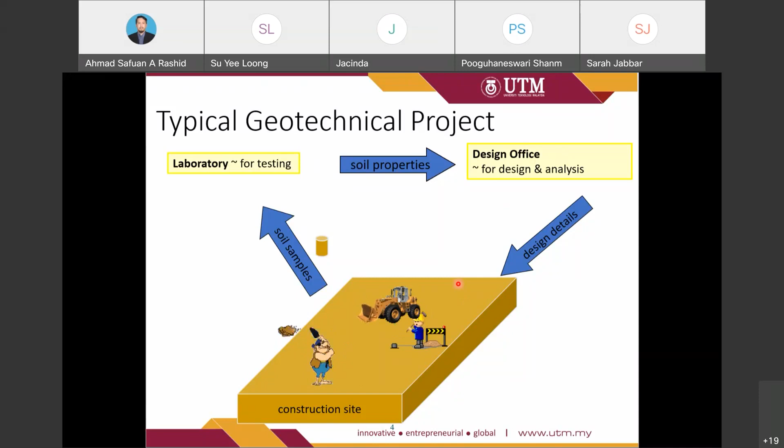The main important thing in the design is to make sure that the structure is able to provide good comfort and serviceability, and also prevent any failure, which is collapse. So in the design, we discuss the serviceability limit state (SLS), and then we also have the ultimate limit state (ULS). Normally when we design, we may use the design load.

So the design load should be monitored to make sure that it does not reach the allowable settlement, in order to have a very good design that prevents any settlement and also prevents any tilt.

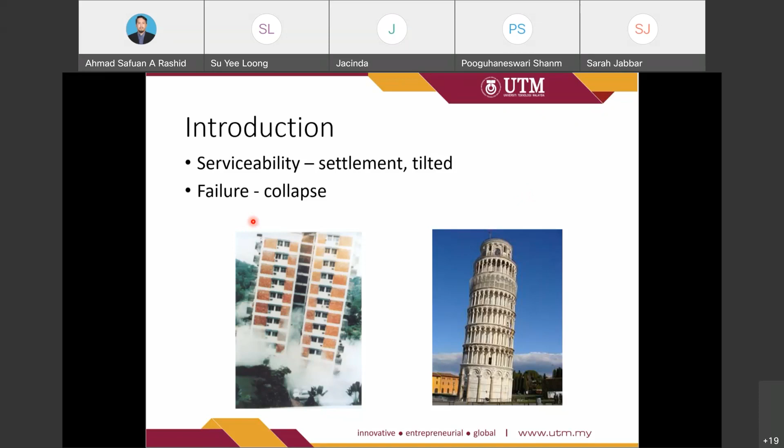Traditional soil mechanics and geotechnical engineering design was predominantly concerned with soil strength and stiffness, so that the design engineer could define the failure state of the soil and control excessive deformations of the soil structure. So that is common work for a designer, to identify the failure state and also to prevent any excessive deformations of the structure.

However, that is under what we call static loads. In this circumstance, the loading is considered static and the strain imposed within the soil may vary from about 10 power -3 in service to a few percent at failure. So there are common strains allowed to prevent failure and also to make sure it can provide good serviceability.

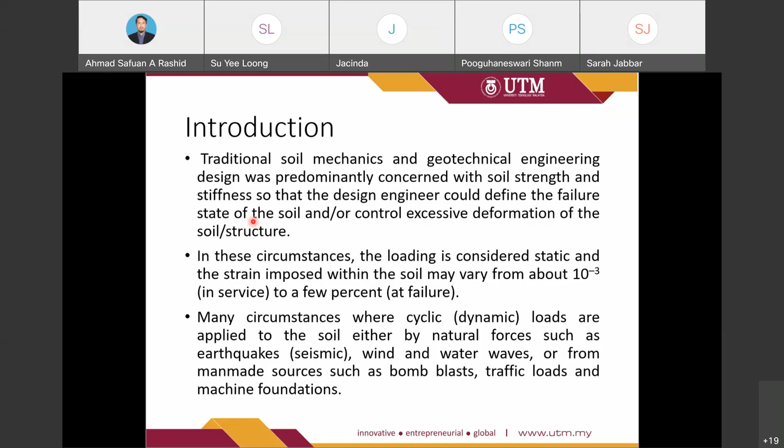Many circumstances exist where cyclic or dynamic loads are applied to the soil, either by natural forces such as earthquakes, wind and water waves, or from man-made sources such as bomb blasts, traffic loads, and machine foundations. So there will be a source of cyclic loads or vibration, either from natural forces or from man-made sources.

So the type of dynamic loading in soil or the foundations of the structure depends on the nature of the source producing it. Dynamic loads vary in their magnitudes, directions, or position with time. Periodic loads are a special type of load that varies in magnitude with time and repeats itself at regular intervals.

So this is some examples where the author tried to describe what is the source of this dynamic load, for example based on the time, such as operation of reciprocating or rotary machines.

So non-periodic loads are those loads that do not show any periodicity, for example wind loading on a building. This is caused by natural wind force.

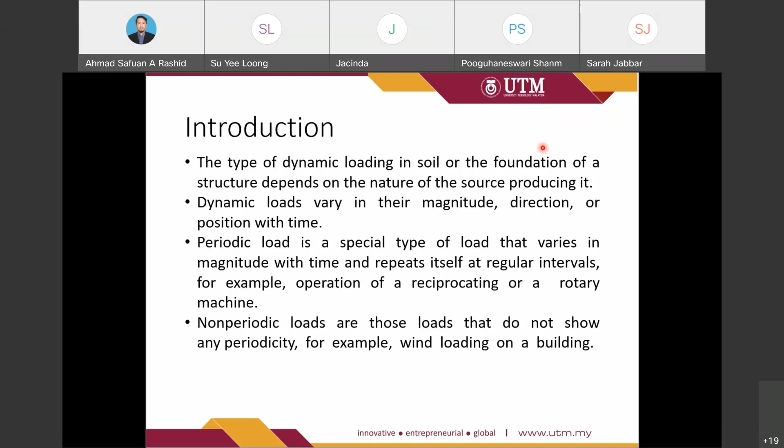So deterministic loads are those loads that can be specified as a definite function of time, irrespective of whether the time variation is regular or irregular, for example the harmonic loads imposed by unbalanced rotating machinery. So this basically is an accurate force that we can determine.

So non-deterministic loads are those loads that cannot be described as a definite function of time because of their inherent uncertainty in magnitude and form of variation with time, for example earthquake loads. This is unpredicted, so it's very hard or very difficult to determine the exact time when the earthquake load will reach.

So cyclic loads are those loads which exhibit a degree of regularity both in magnitude and frequency, while static loads are those that build up gradually over time with negligible dynamic effects. So commonly in our design, we are more emphasized on the static load, however we also can include the effect of cyclic loads in the design.

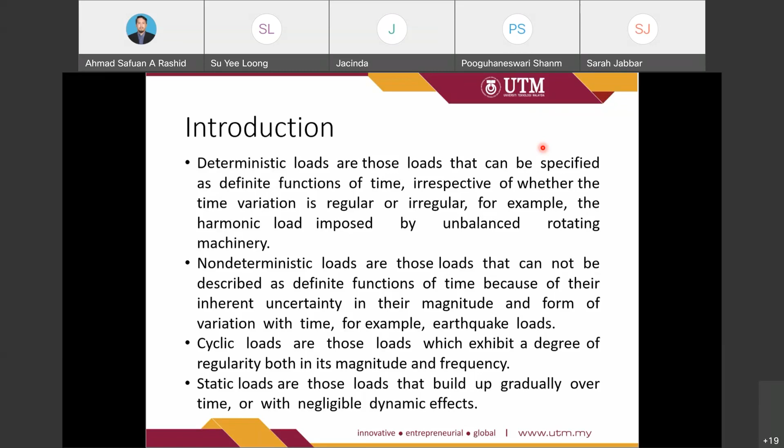So this is an example of dynamic load. So low speed rotary machines, it is a periodic load, so we know when the loads will be applied, and then it constantly shows a cycle on the load itself, on the result.

Then we have what we call a single impact of a hammer, a vertical acceleration due to pile driving. And then the last one is the accelerogram of an earthquake.

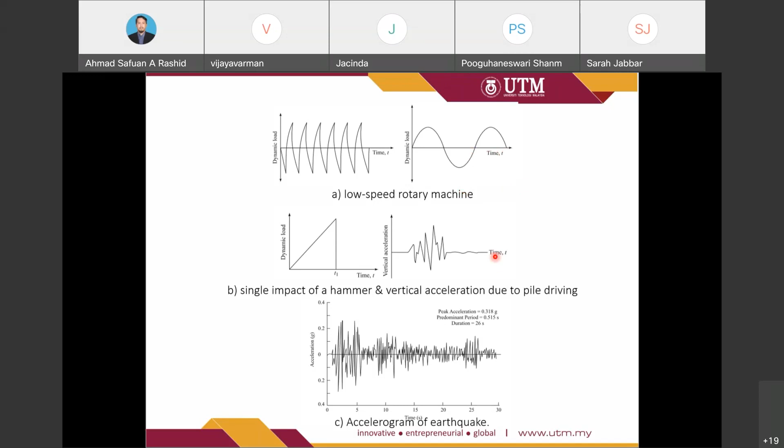So the magnitude of these dynamic loads are generally much smaller than most static loads and generate strain within the soil as low as 10 power -6.

So as we can see in the diagrams, we have two main diagrams, and this is a group of diagrams to explain the shear strain. So for this diagram, it discusses on the

time of loading. The time is very short, and also the number of cycles. So we have here three types of groups to discuss the number of cycles, where we have a shock impulse, which normally refers to blasting or bombing activity.

So the cycle is, for example, the minimum of the dynamic cyclic loads is around 1 Hz, 1 cycle per second, while it can be more than that.

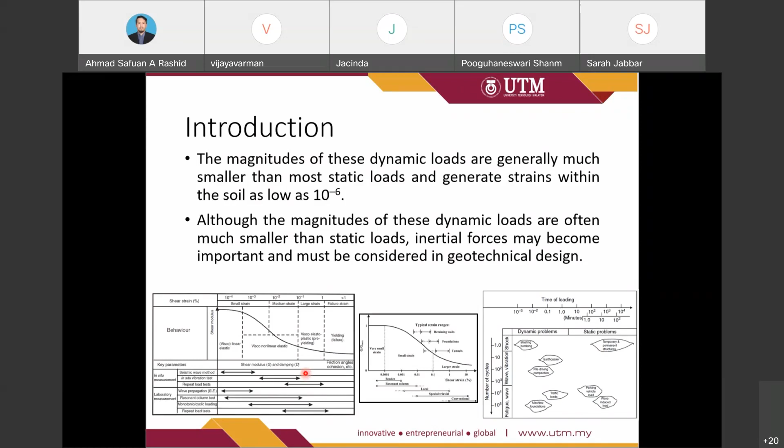So this is an example of the inertia moving to resist a change in speed or direction.

A simple analogy: when we drive a car or somebody drives a car and we sit as a passenger, if the driver stops suddenly, we feel that we are moving forward. Or when the driver accelerates suddenly, we feel that we are going backward.

The same goes for the structure. In actuality the structure is static, but if there are some accelerations on the soil, there will be an effect of the inertial force. This relies on Newton's first law: an object does not accelerate spontaneously. This property of matter which causes an object to resist acceleration has been named inertia.

Newton's first law is often called the law of inertia.

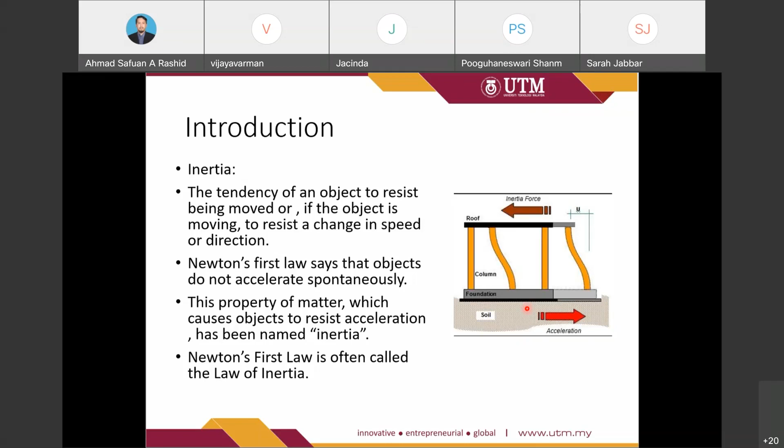Most civil engineering structures involve some type of structural element with direct contact with the ground. As I mentioned previously in the diagram, most structures rest on soil. When external forces such as earthquakes act on this system, either the structure displacement or the ground displacement are dependent on each other.

Even though the foundation structure and the supporting soil are two different physical entities, they form a system, and in terms of the mechanics of behavior of such a system, one component influences the behavior of the other, the end product being the result of this mutual action or interaction between the two.

So this is an early discussion on the study of soil structure interaction. They call it SSI.

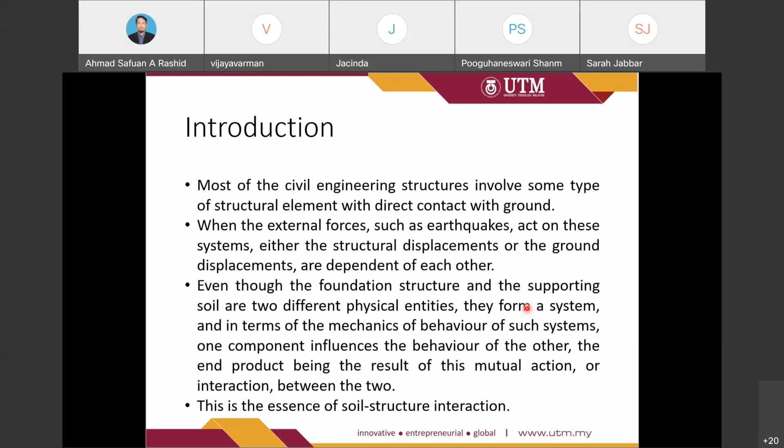At the early stage of design, before the 1980s, they did not consider the SSI effect in their designs. I guess right after the Kobe earthquake event in Japan, they started to include SSI in their design.

The process in which the response of the soil influences the motion of the structure, and the motion of the structure influences the response of the soil, is termed soil structure interaction.

Conventional structure design methods neglect the SSI effect, and neglecting SSI is reasonable for light structures. So we can use conventional design, especially when designing for a light structure resting on relatively stiff soil, such as a low-rise building and a simple rigid retaining wall.

However, the effect of SSI becomes prominent for heavy structures resting on relatively soft or loose soil, especially granular soil. For example, nuclear power plants, high-rise buildings, and elevated highways on soft soil.

So from there, we can get an idea to overcome these problems. One way is to improve the soft soil conditions. Or for the structure itself, maybe we can put in damper systems, which allow the vibrations transmitted to the building to be reduced or minimized by the damper system.

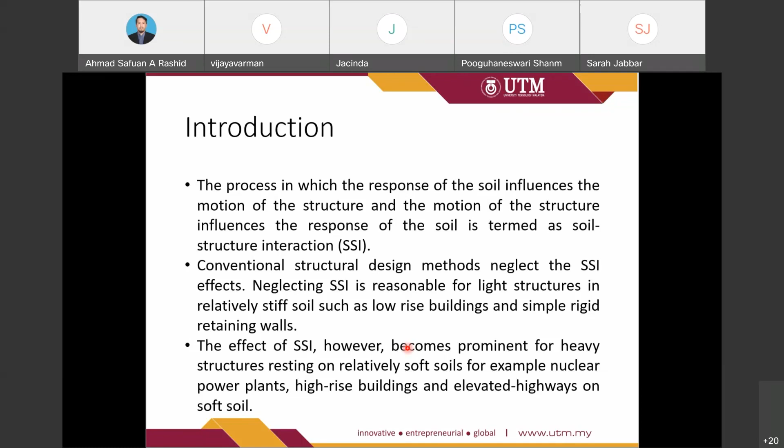Damage sustained in recent earthquakes, such as the 1995 Kobe earthquake, has also highlighted that the seismic behavior of a structure is highly influenced not only by the response of the superstructure, but also by the response of the foundations and the ground as well.

That's why I mentioned the Kobe earthquake—it's very recent, the idea of SSI. When I refer to this Das reference book, they started to embark on SSI in 2005.

In the modern seismic design code, such as the standard specification for concrete structures, seismic performance verification—this is Japanese, JSCE 2005—it stipulates that the response analysis should be conducted by taking into consideration the whole structure system, including superstructure, foundations, and ground as well.

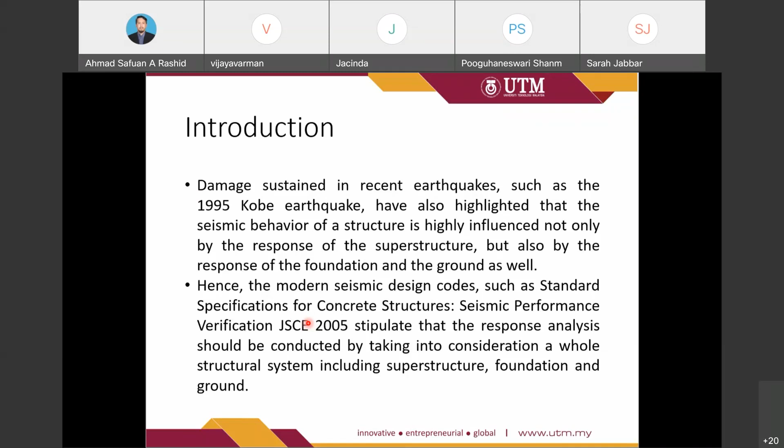So the process in which the response of the soil influences the motion of the structure, and the motion of the structure influences the response of the soil, is termed soil structure interaction, SSI.

Stiffness relates increments of stress to increments of strain. A knowledge of soil stiffness is required to calculate ground movement and to obtain solutions to problems of soil structure interaction, such as load on a retaining wall.

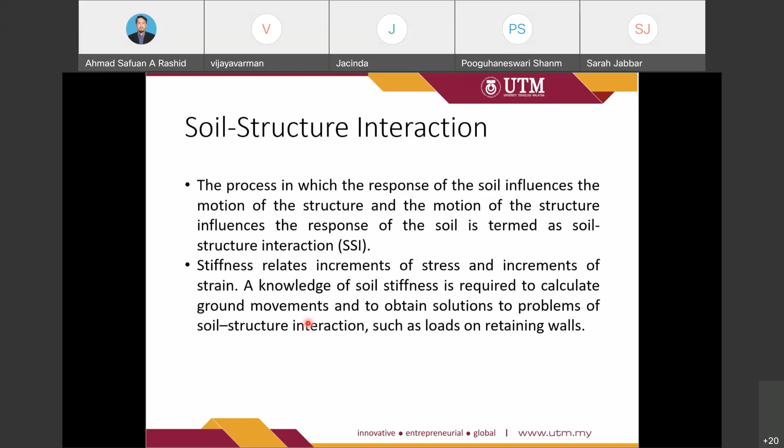So there is some introduction on soil structure interaction, and how they introduced this SSI after the 1995 Kobe earthquake event.

So this is some example. When an earthquake occurs, the building and the ground vibrate, influencing each other. This phenomenon is called dynamic soil structure interaction, and it's recognized as being very important for seismic design of structures.

So this is the earthquake wave from the epicenter, transferred to the soil, migrating through the soil, and then transferred to the foundations, either pile, basement, or shallow foundations, and then transmitted to the building.

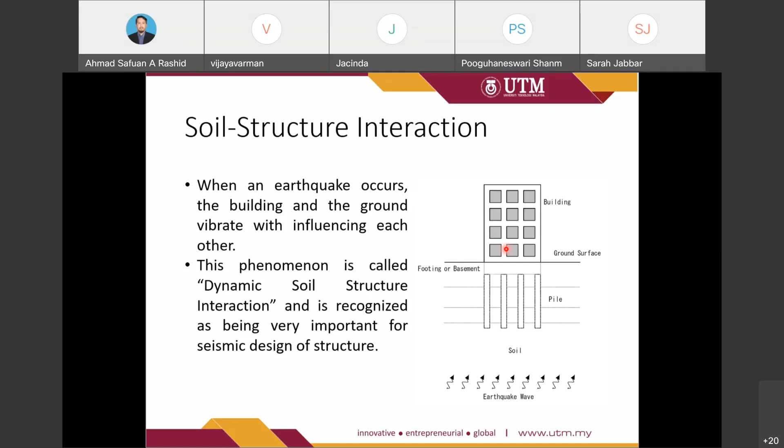So the role of the foundation: under normal or static conditions, it supports the dead weight and live load of the building, and also transmits this load to the ground.

This is an example of the function of the footing or foundation. We have a slab. The slab transfers load to the beam, which transfers to the column, which transfers to the pile cap if using a pile cap with piles, and then transfers to the foundation.

And transfers to the soil. During an earthquake, the ground motion is transmitted to the building, bearing the building's vibration and transmitting it back to the ground. So when the earthquake event occurs, the wave is transmitted to the foundation, then to the building, and the wave also moves back to the ground.

The ground and the building influence each other through the foundation, and this is called the dynamic soil structure interaction.

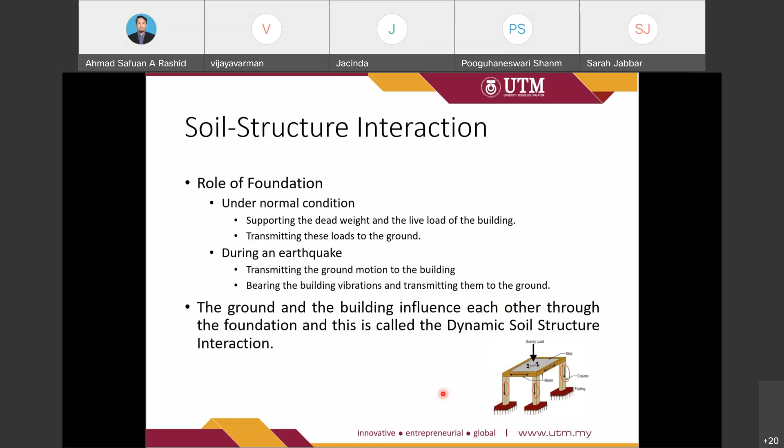So the degree of soil structure interaction on the response of a building depends on the stiffness of the ground, the dynamic characteristics of the building itself—that is, natural period or damping factor—and the foundation type. So we have three dependencies: stiffness from the ground itself, the characteristics of the building such as natural frequency and damping factor, and the foundation type.

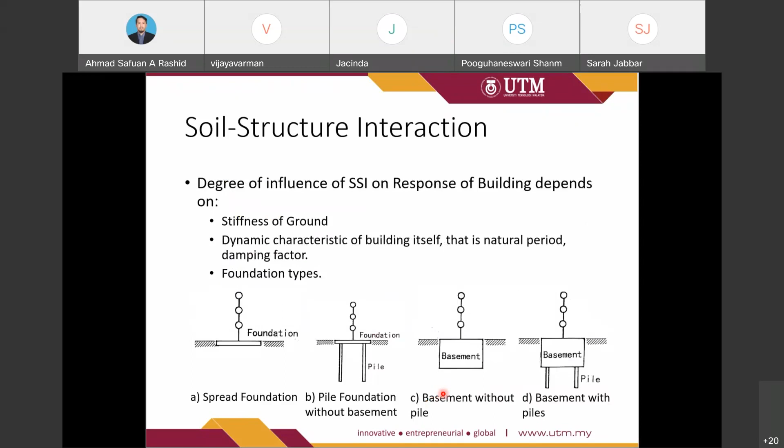So the influence of the SSI becomes remarkable and more complicated as the amount of contact between the ground and the foundation increases sequentially in order from A to D. So this means D is more complicated, in order to understand the soil structure interaction.

Interaction between ground and building during the earthquake event. This is a more detailed explanation during the earthquake event, from the fault or epicenter. So when the seismic wave, which is E naught, generated by the earthquake fault, reaches the bottom of the foundation, it divides into two types.

So we have E1, the wave entering into the building, and F naught, the wave being reflected back into the ground. E1 is called the transmission wave, while the wave F naught is called the reflection wave. So this reflection wave goes back to the soil, while the transmission wave enters the building from the foundation.

So the transmission wave E1, entering into the building, travels towards the top of the building, subjecting the building to vibrations, and then reflects at the top and travels back down to the foundation. Here, a crucial phenomenon occurs for consideration of the SSI.

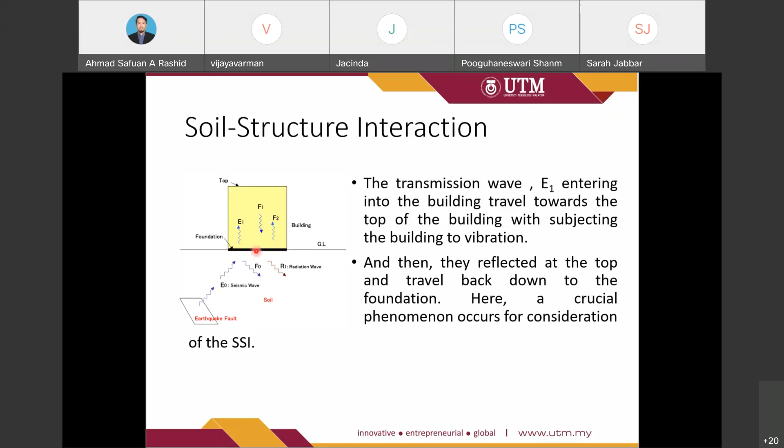The wave migrates to the top and then goes back again. This is called F1, and there will also be a radiation wave R1 when it reaches the foundation. Then they separate into two waves, F2 and R1.

When the wave that is reflected at the top of the building and traveling downward, F1, reaches the foundation, part of it is transmitted into the ground while the rest is reflected back again and starts to move upward through the building. The former wave, escaping into the ground, is called the radiation wave R1. The one that moves up is called F2.

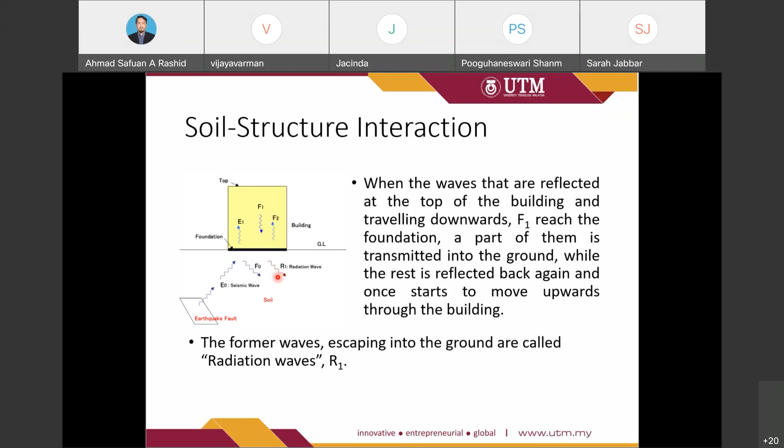So when the amount of radiation wave is small, the seismic wave transmitted into the building causes the building to continue vibrating for a long time, like a cycle, until the vibration is eliminated or completed. The apparent vibration condition becomes the same as small damping of the building.

So for example, if we have a very good damping system, this F2 or F1 could be minimized later on. The damping caused by the escape of the seismic wave, which has been transmitted into the building, back into the ground, is called radiation damping.

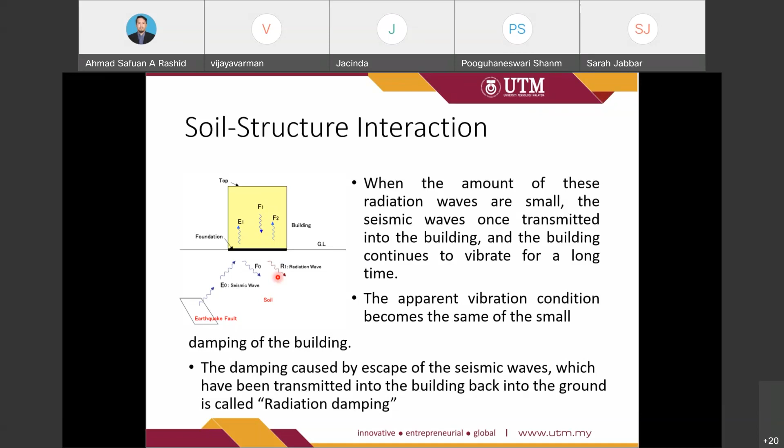So when the building foundation is forced to vibrate vertically, a stress called contact earth pressure is caused at the boundary between the bottom surface of the foundation and the ground. The distribution of this contact earth pressure over the bottom surface of the foundation is called the contact earth pressure distribution.

So this is the common type of distributions of the foundation, where we have a rigid foundation rigidity type, uniform soil classification type, and also parabolic distribution. Non-linearity is also observed, depending on the loads and the type of the foundation. So this is the common type of the foundations.

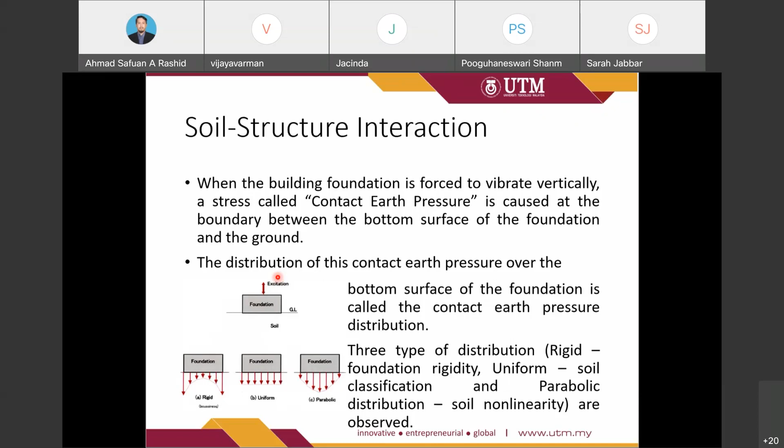We call it a contact earth pressure diagram. For foundation and substructure solutions with increased complexity, more involved methods of calculating the force and displacement of the structural elements are required. The use of more basic approaches that rely heavily on hand calculation or rule of thumb may not be appropriate in such situations, as there may be too many degrees of indeterminacy within the problem, or they may simply be too time consuming to use. Later on, the use of finite element models allows the user to create a soil structure model of the whole or part of the problem with relative ease.

Similar to when we learn about the slip surface of slope stability, we normally use the method of slices, so we can easily calculate using hand calculation if we want to determine the factor of safety for the first time. But this factor of safety is not the optimum value, so as a suggestion, most reference books suggest using commercial software. For example, we may use GeoStudio to ease our work in determining the stability of the slope.

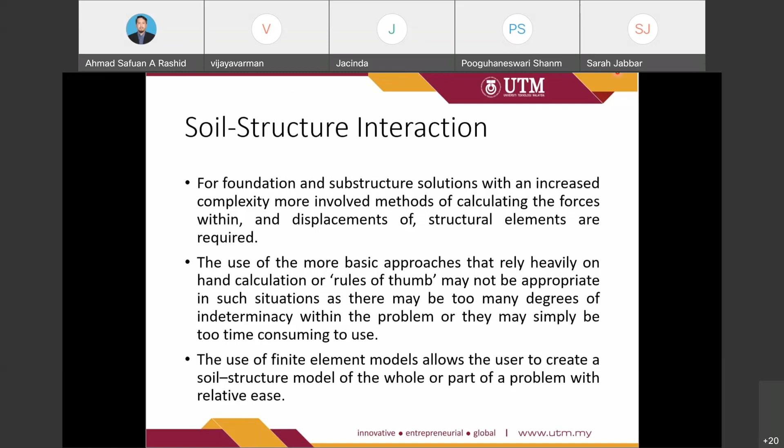This model can generally be modified to respond to changes in design or undertake parametric studies that might otherwise take a great deal of time. Soil structure models can also provide us with a means of predicting the impact of one structure on another. Displacement and stress change can be calculated for different construction phases. So there is a little bit of detail on the SSI approach.

However, I don't have any experience using this SSI, because most of our design is related to static load, unless we have some important structure that we need to design by including the vibration effect in the design itself.

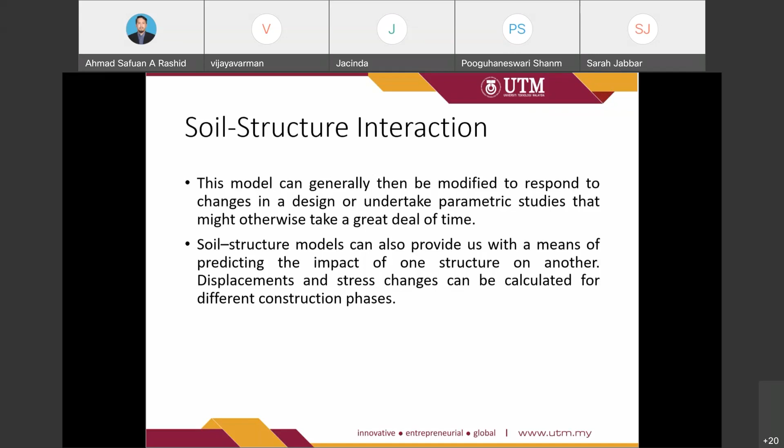So now we move to wave propagation in soil. This is to gain what we call the shear modulus, where we can use some instruments to determine the type of wave. There will be three types of wave that are readily encountered and are of importance: P wave, S wave, and the last one is the Rayleigh wave. The first two are termed body waves, which are propagated within the soil and comprise the compressional wave and the shear wave, the S wave.

In relatively soft saturated near surface sediment, which is likely to be the case for a large number of geotechnical problems, the P wave, or VP, is dominated by the bulk modulus of the pore fluid, where the water fills inside the pore, or the water is hard compared to the soil, and the resultant VP may be close to that of the pore fluid. So if we are dealing with saturated soil, it is wise to use or determine the S wave value.

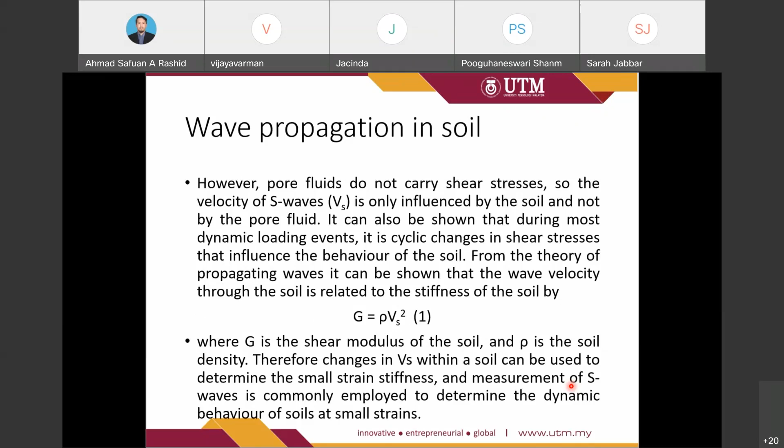So, in that case, the suggestion to use the S wave will be wise, because the pore fluid does not carry shear stress, so the S wave is only influenced by the soil and not by the pore fluid. Water cannot experience any shear stress, it only can experience a compression stress.

It can also be shown that during most dynamic loading events, it is cyclic changes in shear stresses that influence the behavior of the soil.

From the theory of propagating waves, it can be shown that the wave velocity through the soil is related to the stiffness of the soil by using G equal to rho Vs squared. So by using this S wave, we can predict the G or shear modulus of the soil by multiplying it with rho, the soil density.

Therefore, changes in Vs within the soil can be measured to determine the small strain stiffness, and the measurement of the S wave is commonly employed to determine the dynamic behavior of soil at small strain.

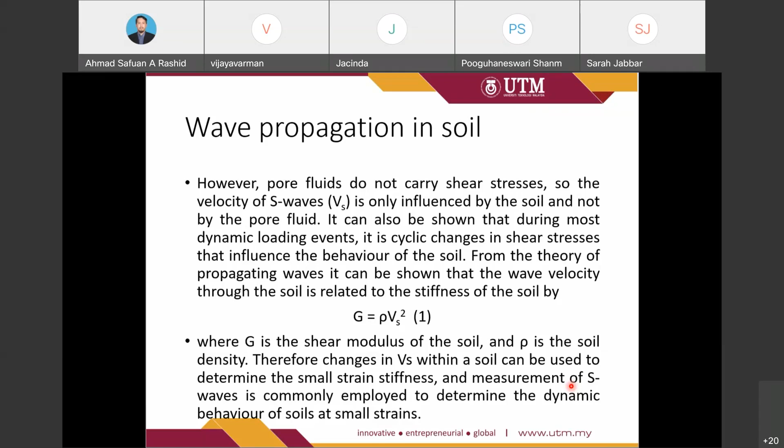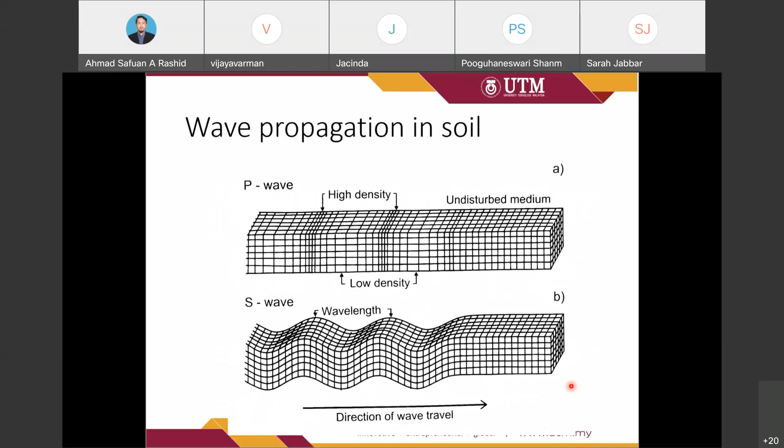Shear wave: a wave in which the disturbance is an elastic deformation perpendicular to the direction of motion, also called a transverse wave. Compression wave: a wave where the disturbance is compression of the medium, also known as a longitudinal wave.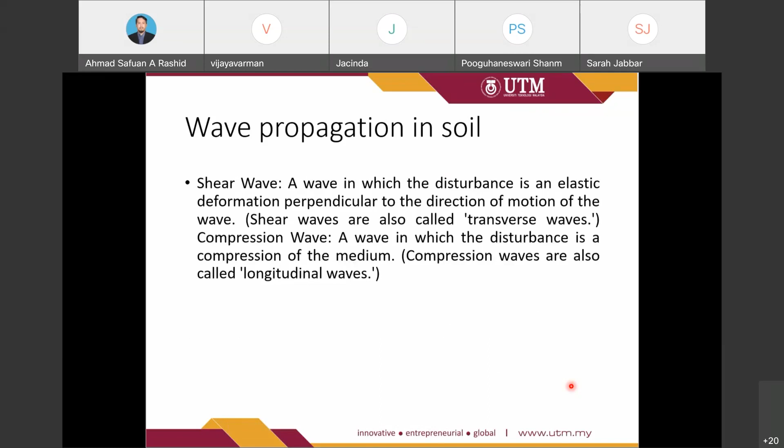So the third wave, that is the frequently encountered in soil, is the Rayleigh wave, which travels along the ground surface.

Rayleigh wave measurement has gained importance in recent years, since ground surface measurement can be readily and easily undertaken without the need for any intrusive investigations. The author mentions here that they can easily get the value for the Rayleigh wave because it travels along the ground surface.

Compared to the S and P wave, those need equipment that would penetrate inside the soil body. So there is no direct link between the velocity of the Rayleigh wave and the soil stiffness.

However, it's been shown that for nearly all values of Poisson ratio, the R wave or Rayleigh wave has a correlation with the S wave, due to the Poisson ratio properties.

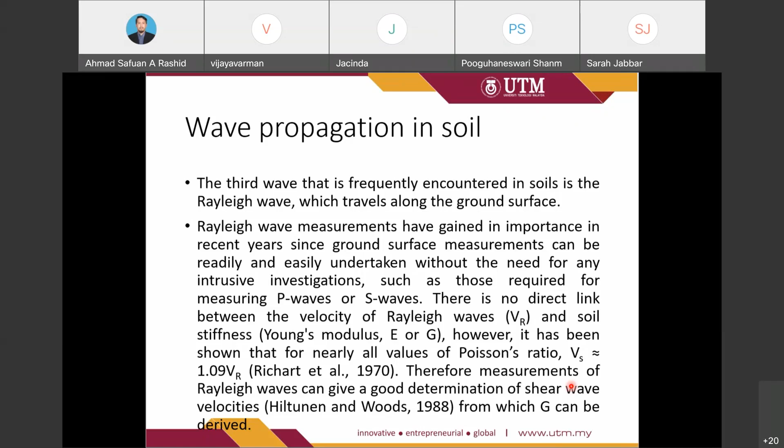Therefore, measurement of the Rayleigh wave can give a good determination of shear wave velocity, from which G can be derived. So once we determine the VR, multiply with 1.09, then we can get the value of Vs, and this Vs will be used to determine the G.

So this is an example of the Rayleigh wave as shown in a diagram.

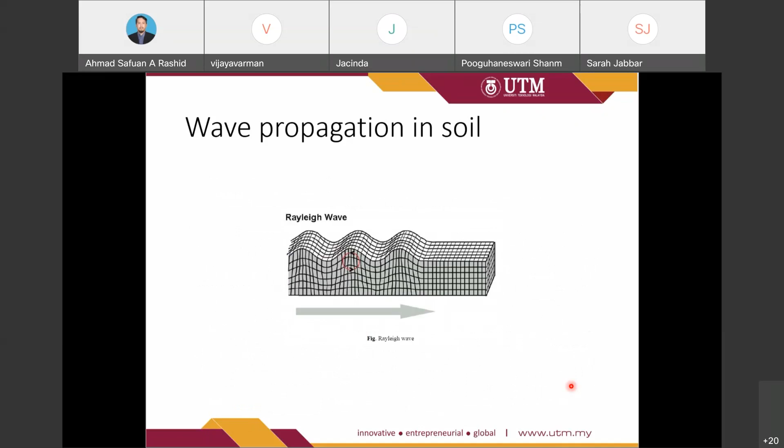So that is some brief explanation on the wave propagation in the soil. We have three types of waves.

So now we move to another topic, which discusses the method to improve or stabilize the ground, in order to minimize the effect from the earthquake.

In both seismically active and inactive areas, soil improvement techniques are commonly used at sites where the existing soil conditions are expected to lead to unsatisfactory performance. Unsatisfactory performance can take many forms, but usually involves unacceptably large soil movement, including horizontal or vertical or both components, which may take place during or after earthquake shaking. In the absence of earthquake shaking, unacceptable movement usually results from insufficient soil strength or stiffness.

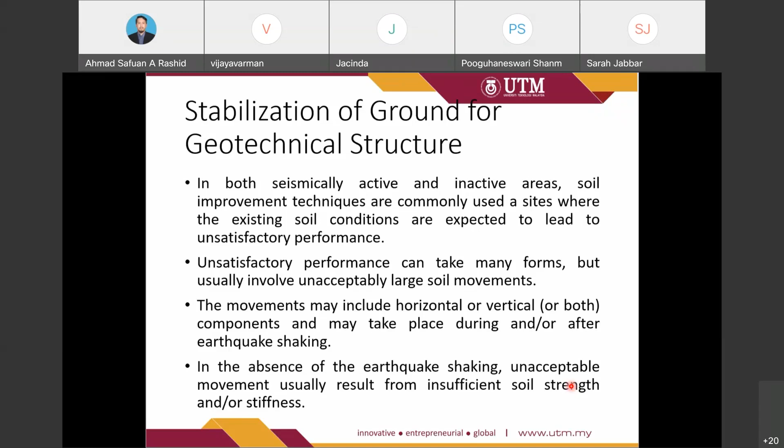Consequently, most soil improvement techniques were developed to increase the strength and stiffness of the soil deposit. So that is the idea of ground or soil improvement.

During an earthquake event, the build-up of excess pore water pressure can lead to very large deformations. This is due to the soil being very weak, or the density of the soil being very low, so it can easily build up excess pore water pressure.

The most common soil improvement techniques can be divided into four major categories: densification techniques, reinforcement techniques, grouting and mixing techniques, and the last one is drainage techniques. So we have four types of ground improvement methods.

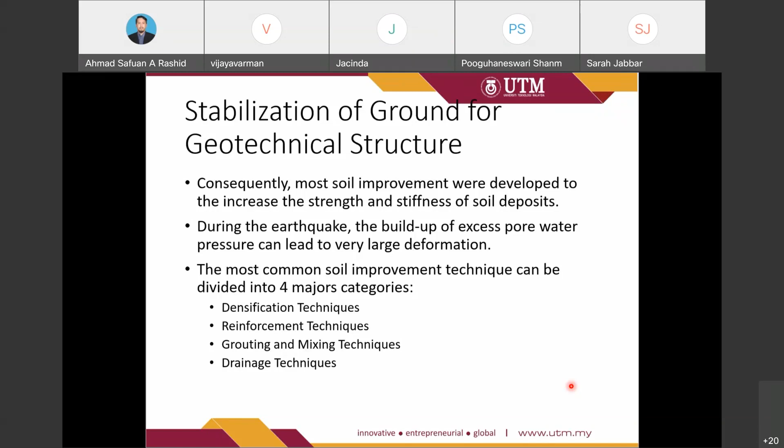So for the first one, the particle densification technique - the particles that comprise a particular soil can be arranged in many different ways.

The strength and stiffness of the soil is higher when the particles are packed in a dense configuration than when they pack loosely.

So that is common sense there - the strength and stiffness is higher when the soil is compacted dense compared to soil which is packed loosely.

Also, the tendency to generate positive excess pore water pressure due to cyclic loading is lower when the soil is dense than when it is loose.

As a result, densification is one of the most effective and commonly used means of improving soil characteristics for mitigation of seismic hazard.

Due to that, densification is part of the common technique and also an effective method to be used.

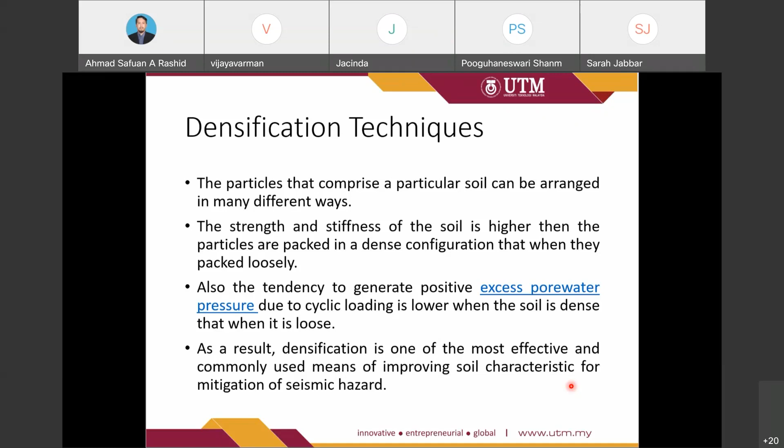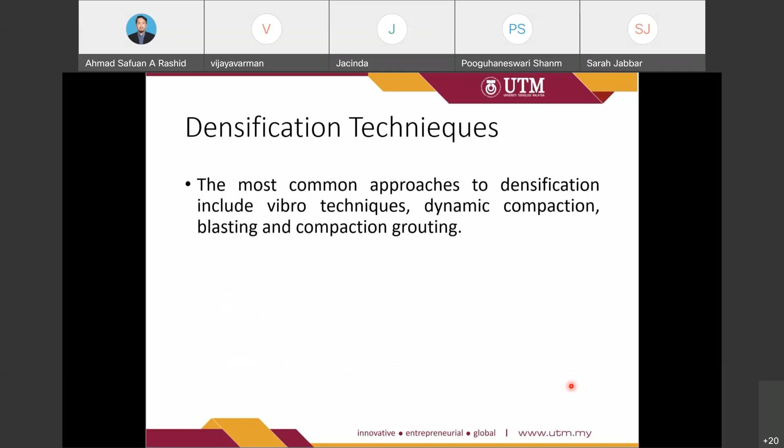So the most common approaches to densification include Vibro techniques, dynamic compaction, blasting, and compaction grouting.

Vibro techniques use probes that are vibrated into a soil deposit in a grid pattern to densify the soil over the entire thickness of the deposit.

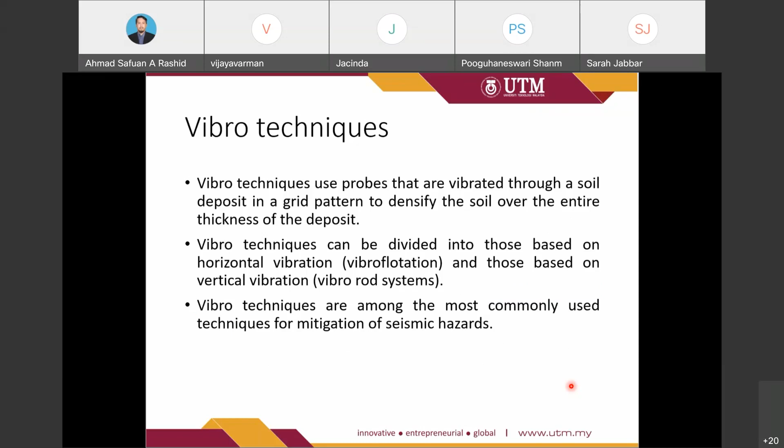I guess you are also very familiar with this type of method - this is an example of the Vibro method.

It can be used in small scale, or it can be used in a very large scale by using large machines.

So this machine can provide vibration. At the end, it can pack the soil into dense conditions.

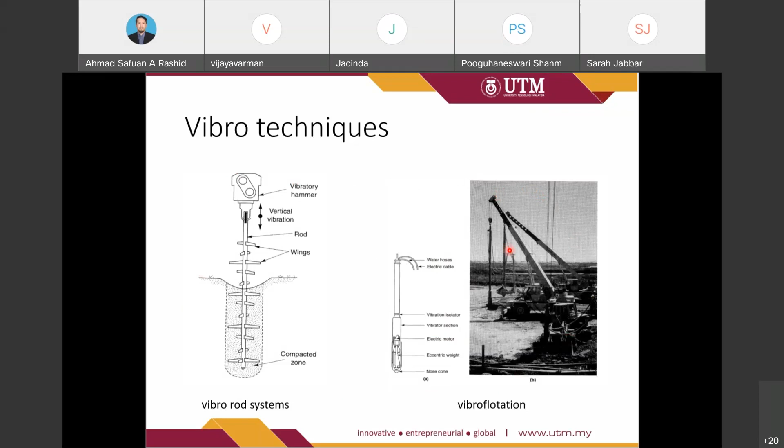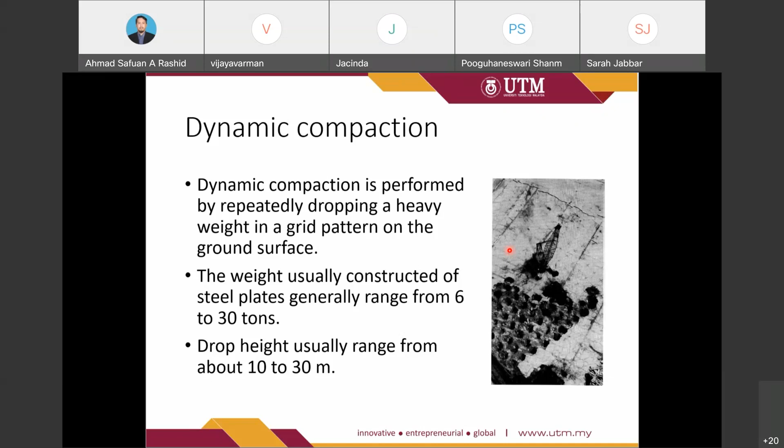It's a very huge amount of energy released from this dynamic compaction method.

And the other one is blasting - loose granular soil have been compacted by blasting.

Blasting densification involves the detonation of multiple explosive charges vertically spaced 3 to 6 meters apart in drill boreholes.

The boreholes are usually spaced between 5 to 15 meters apart and backfilled prior to detonation. So this is another method - densification by using blasting.

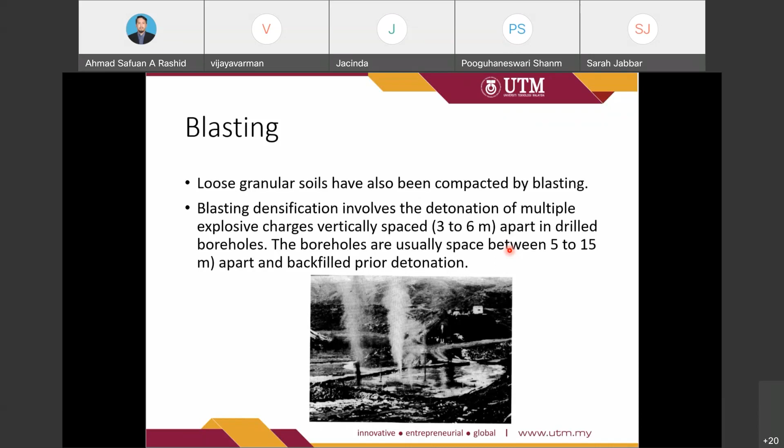So the objective is to densify the soil, to reduce or minimize the effect from the earthquake.

The second method is compaction grouting - for soft soil, this... you can read later on.

So they inject grouting material and then...

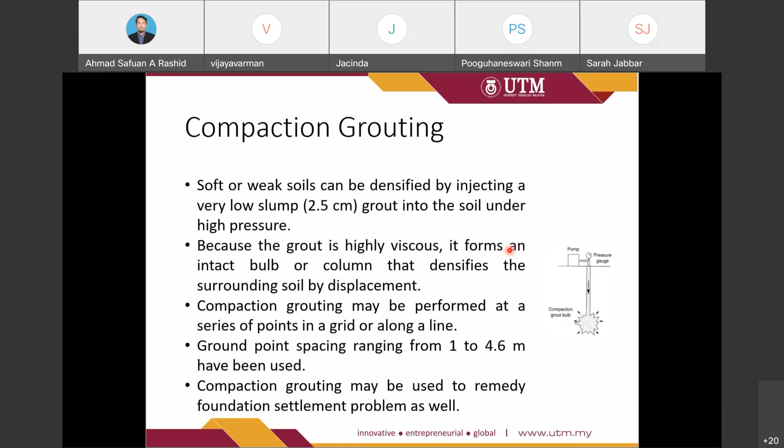...let it sit for a period of time to make sure that it reaches the hardened state of the material.

Reinforcement technique - this is by applying a stiff material inside the soil.

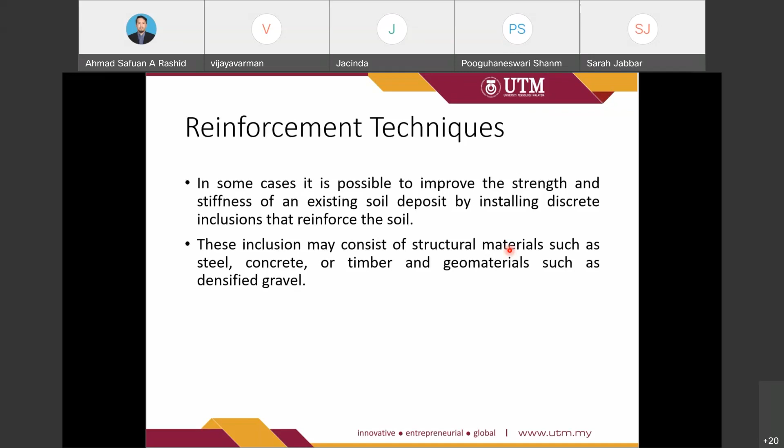Either by using a piling system, concreting, or by using timber.

This is an example of the stone column method, where they inject or install a column - install stone - inside the soil.

For mitigation of seismic hazard, stone columns are commonly used for improvement of liquefiable soil deposits.

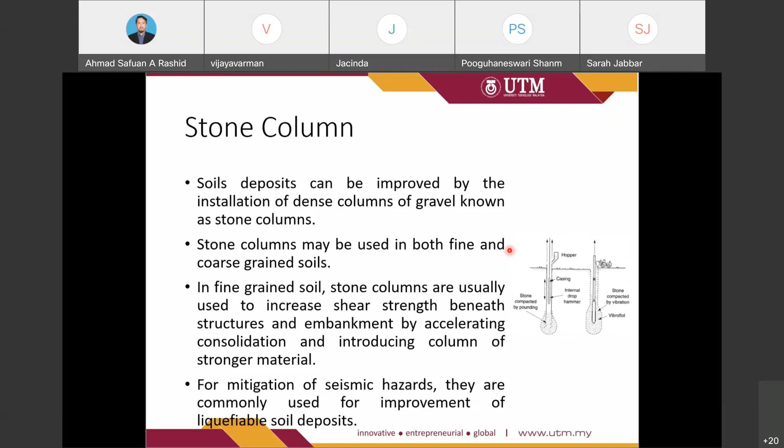It improves the seismic performance through three different mechanisms.

The flexural strength of the pile itself provides resistance to soil movement. The vibration and displacement produced by their installation cause densification. The installation process increases the lateral stress in the soil surrounding the pile.

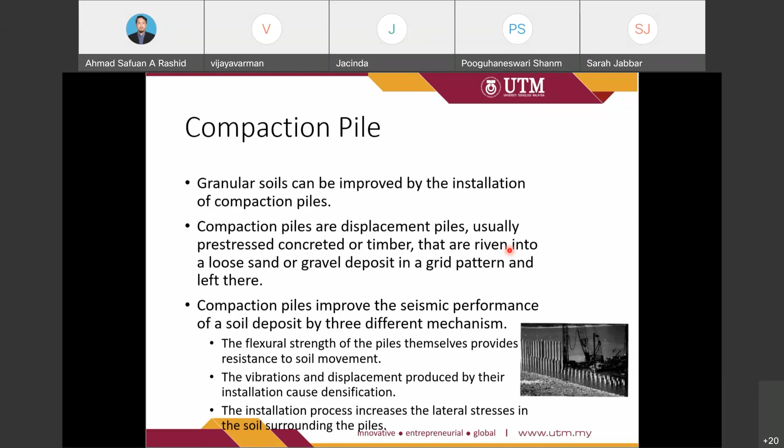So then we have grouting and mixing techniques. For example, for this case,

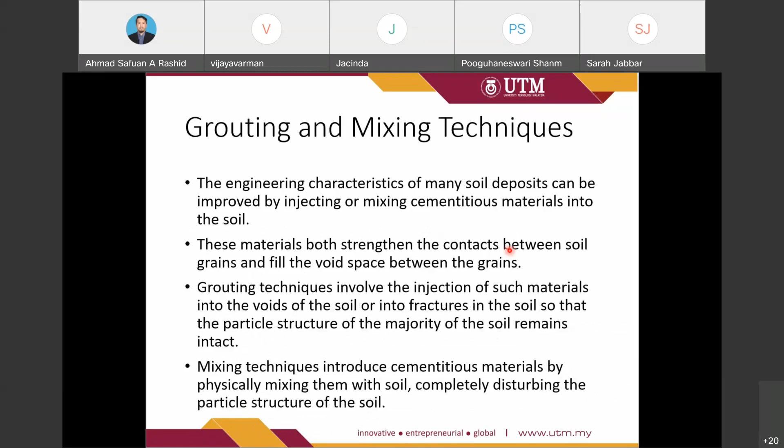they are using what we call grouting and also mixing - this is what we call the deep mixing method.

So they mix a stabilization agent, either lime or cement,

with the surrounding soil. This one is DSM - Deep Soil Mixing, Deep Mixing Method, DMM - ground treatment.

Actually, when I did my PhD, I investigated the performance of this deep mixing method by using a small scale physical test.

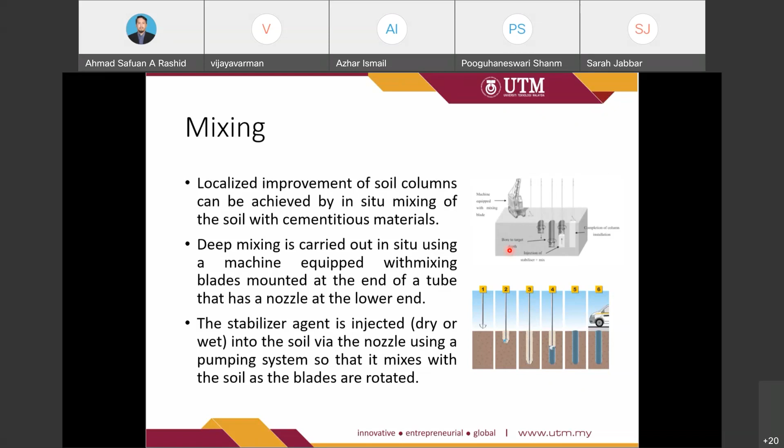So then the last one is the drainage technique - eliminating liquefaction risk by lowering the groundwater table prior to earthquake shaking. That is the idea of this drainage technique.

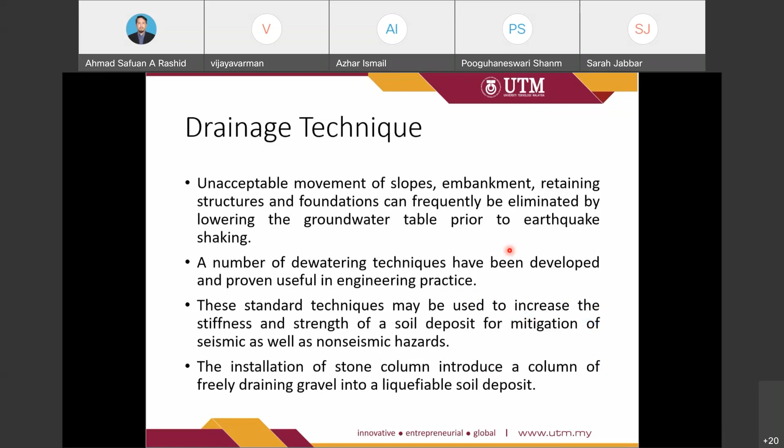For example, the common type of drainage technique is the PVD - prefabricated vertical drain - which can also accelerate the consolidation process of the soft soil area.

So the idea of all the ground improvement techniques is to ensure that the soil is dense, in order to avoid a high excess of pore water pressure during the earthquake event, which leads to a liquefaction effect on the soil.

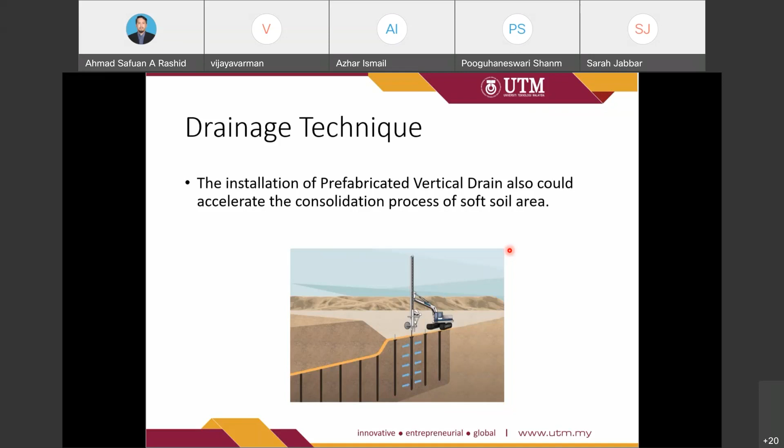So that is all for the introduction part.